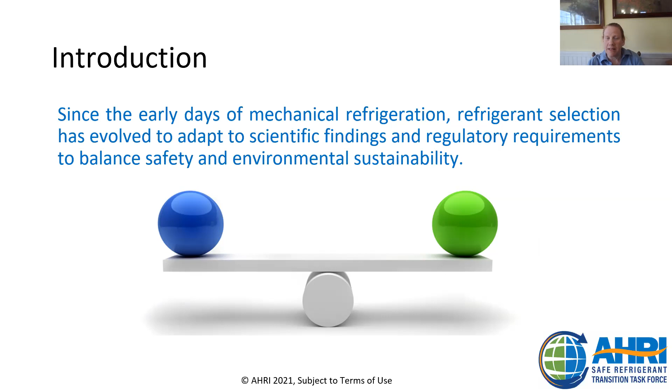So we just want to firstly talk to you about refrigeration regulations in general. Since the early days of mechanical refrigeration, the selection of refrigerants has changed to adapt to scientific findings and regulatory requirements, balancing safety and environmental sustainability. So now I just want to talk with you a little bit about refrigerant regulations. Refrigerants are approved by the Environmental Protection Agency only after an analysis of safety, toxicity, flammability, and other environmental factors. Also, we're going to talk a little bit about the 2020 American Innovation and Manufacturing Act, signed into law on December 27th last year by President Trump, which requires a transition of current refrigerants.

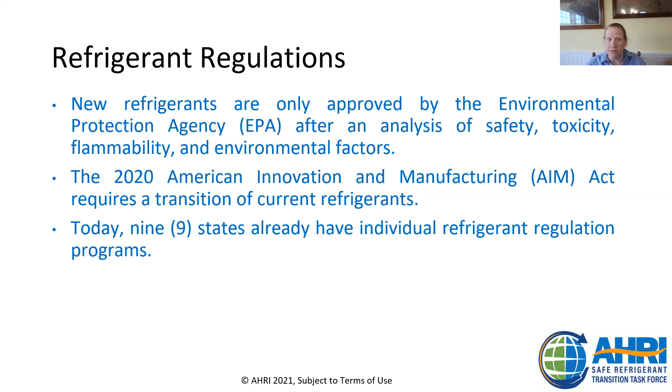Today, in addition, it would be important to note that 9 states already have individual refrigerant regulation programs requiring transitions of refrigerants. In summary, current refrigerants are being replaced by alternatives, such as A2L, lower flammability, and traditional refrigerants with a smaller environmental footprint.

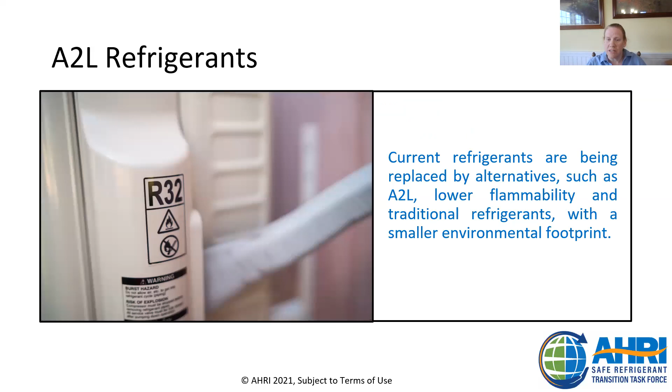So the EPA I mentioned earlier looks at refrigerants from the perspective of safety, flammability, toxicity, and environmental footprint, and then determines their suitability for use. The EPA Significant New Alternatives Policy Program, the SNAP program, allows flammable refrigerants as long as the safety standards are adhered to. So for example, residential and light commercial air conditioning refrigerants are just now allowed this month for larger charge sizes. For smaller charge sizes, they've been allowed since 2015, for chillers since 2012, for self-contained refrigeration also since 2012, and auto air conditioning since 2011.

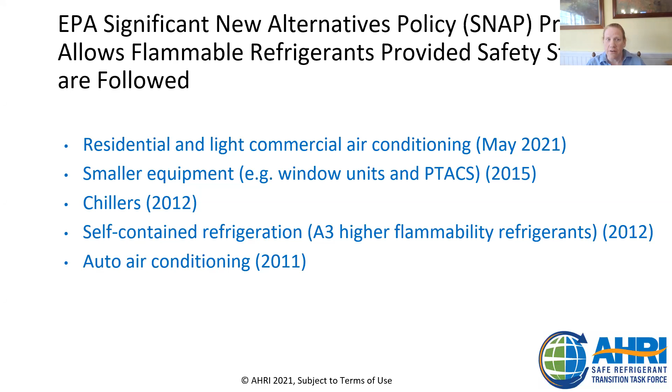On the other side of things, there are mandates in some cases from a regulatory perspective to transition away from older or current refrigerants into refrigerants that will likely be flammable. So today, plug-in appliances, like refrigerators in your home, window units that you might purchase at a big box store, and light-duty vehicles all contain A2L refrigerants or A3 refrigerants now.

In 2024, we anticipate that commercial refrigeration equipment in Washington State will be using a flammable refrigerant, as will chillers. In Washington State and 9 other states, residential and light commercial air conditioning equipment will likely transition across the nation in 2025. And probably in 2026, remaining commercial refrigeration equipment will transition away from current refrigerants, including to some A2L or A3 flammable refrigerants.

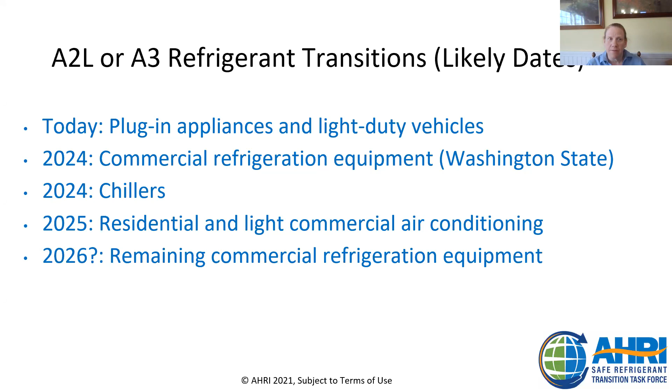So it's important to quickly think about what's the same: what are the hazards of the current refrigerants? With current refrigerants, if there's a combustion, if they're exposed to fire, any fluorinated refrigerant will combust to a hydrogen fluoride gas, which would become hydrogen fluoride acid if water is sprayed on it. Oxygen deprivation is possible in tight and enclosed spaces, like a crawl space, or even a machine room for a large charge size.

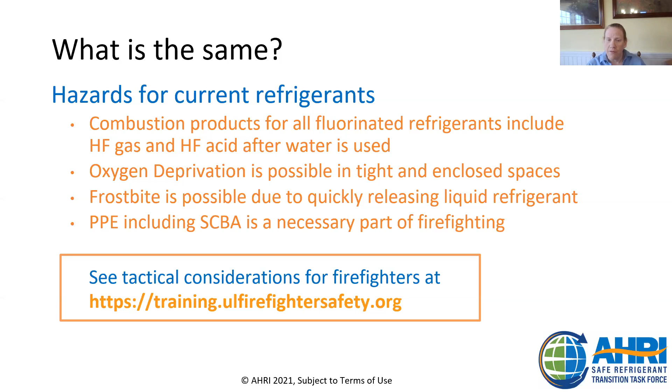Frostbite is also possible with a quick release of a liquid refrigerant, and personal protective equipment, PPE, including SCBA, is a necessary part of firefighting. And the tactical considerations for firefighters at this link will provide you with much more information than we will get into today.

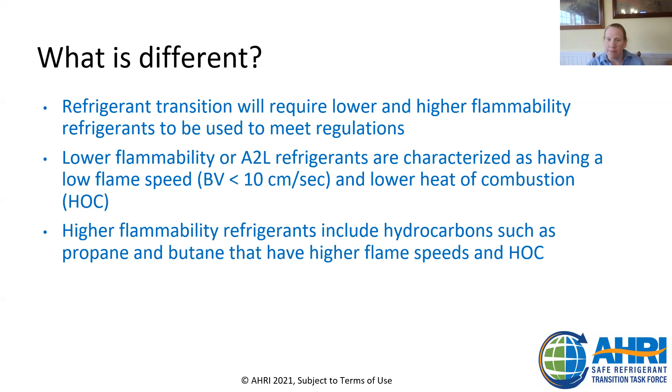So what's the difference? What's new with these new refrigerants? The refrigerant transition will require lower and higher flammability refrigerants to be used to meet regulations. These lower flammability or A2L refrigerants, as you may hear about them today, are characterized as having a low flame speed and a low heat of combustion. Higher flammability refrigerants include hydrocarbons such as propane and butane that have high flame speeds and high heat of combustion.

So AHRI, the Department of Energy, the California Air Resources Board, and the American Society of Heating, Refrigerating and Air-Conditioning Engineers have spent well over $7 million in next generation refrigerant research. They've looked at the validation and mitigation of safety standards, leak detection technology, ignition byproducts, ignition properties, flammable refrigerant product risk assessments, ignition sources, and other research around the safe use of flammable refrigerants.

So what was missing? Why did we move forward with this 8028 project? Refrigerants and Firefighter Tactical Considerations is the first project of its kind related to fire impinging on refrigerants and equipment, to provide practical information for first responders for the purposes of developing training. Although there's been a considerable body of industry research, it's focused largely on A2Ls with some research on A3s. This piece of the puzzle was missing.

So what does this change mean for the fire service? What are these A2L refrigerants and how do they compare with the substances they're replacing? Some of these were questions the fire service had. I want to turn to our panelists today: Kathy Stacia and Chief Offerman, as well as Steve Kerber and Dick Lord. I wanted to open the floor for you to talk about what you saw and what you needed to know to be comfortable with this transition. Kathy, is it okay if I start with you? What were you looking for? What kind of information was missing for you?

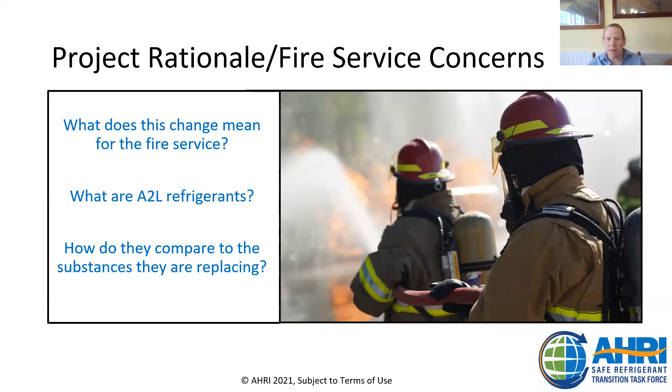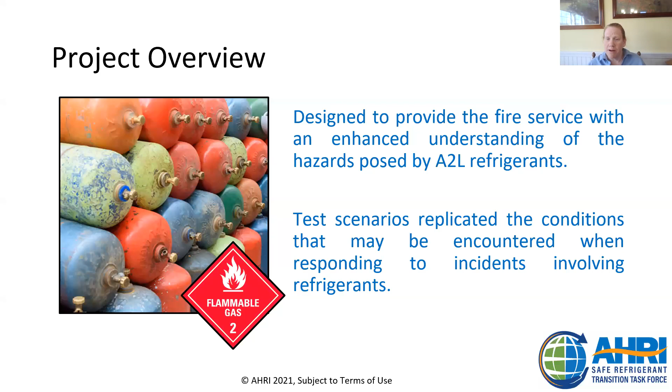Thank you, Kathy. That's very helpful. And Mary, you can probably go to the next slide. And so I think there was kind of an exploration around what was needed from the fire service perspective, and we tried to put together some test scenarios to replicate some conditions that might be encountered when responding to incidents involving refrigerants. And we'll talk a little bit more about those here in a minute. Mary, if you could go to the next slide. So these are the organizations and collaborators that worked together to develop these scenarios. And then we're just going to go to the next slide, Mary, and then maybe we'll open it up again for the panel to kind of talk through this a little bit.

So the fire service had several requests and wanted to look at a couple of different scenarios and better understand things. Bill, if you don't mind talking a little bit about what you were hoping to see, and Steve, maybe what you all were hoping to see in some of this work, that would be very helpful.

Thanks, Ellen. When I first found out about the flammable refrigerants, we were concerned that this was going to react similar to propane. So we were anticipating a much higher level of fire spread and possible explosion in residential situations, commercial situations. It was something that we did not see through the testing process. So it was quite the surprise to not have that situation.

However, the toxicity, I should say, the hydrofluoric acid that was developed was a bit of a surprise as well. We were not aware of that. It really wasn't much of a change from the existing refrigerants. However, we were not aware that it was there to begin with. So now that we're putting together the training to make sure everybody's aware of it and make sure that they keep their gear on, their air packs, I think it's gonna be great for the fire service to at least catch up to where we need to be. Steve, is there anything you'd like to add?

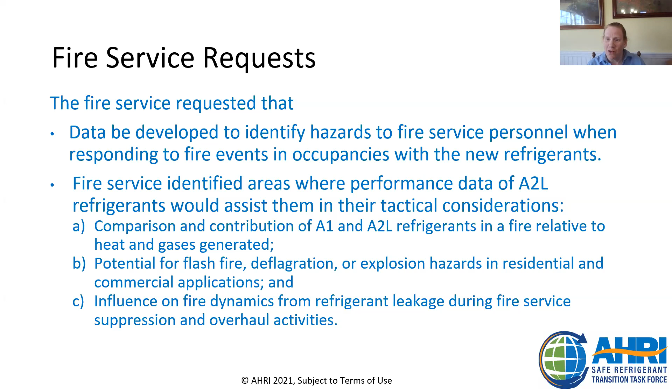Steve, you took the words, and I was just going to say thank you to them. I know they're not on this panel, but thanks to them, and thanks to Bill and other folks that attended all those sessions, Dick and others that sat through all those very long days, and all the work that went into this. I think a really nice product has come out of it. Mary, before we just keep congratulating everybody in a circle, we probably should move along to the next slide and let Steve talk a little bit about these scenarios.

Yeah, thanks, Helen. So I'm going to briefly go through the scenarios that were covered in the project. Essentially, once all the stakeholders agreed on what the questions were, we all had to figure out how we were going to get these answers. And that wound up showing itself as a series of test scenarios, in which many variables were examined, many iterations were done, many different refrigerants were examined. And ultimately, this becomes the backbone of the online training course I will talk about. That's one of the ultimate outputs of this project.

So scenario one was conducted to collect comparative data on selected A1 and A2L refrigerants, and to really look at quantifying what they contributed to the heat and the gases generated during a fire. As you can see in the picture here, simulating a refrigerant leak blowing across a fire that is already existing to see what it contributes to the ultimate heat release rate, as well as other measurements, whether HF concentration, temperature measurements, heat release rate, were all important.

We saw this as a nice side-by-side comparison, something that's been effective before during other experiments. If the fire service can see one right next to the other, that provides a pretty good visual indication as to how they're different. And that's what we were going for in scenario one.

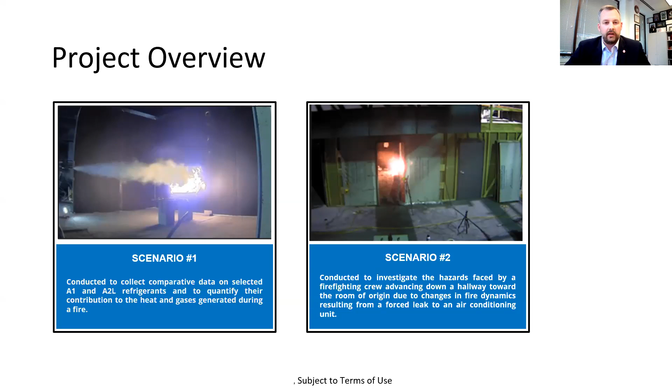Both of those scenarios were examined, and ultimately the measurements here are looking at if a hose line is being advanced, and the room of fire, let's say, is a basement storage room at the end of the hallway there. If they were on their way, not able to put water on the fire yet, what would the resulting fire dynamics be should that leak occur, is what we were going for in scenario 2. Next slide.

So scenario 3, ultimately the team decided didn't need to be run. This was really set up as an optional scenario based on what we learned in scenario 2. The difference here was going to be, instead of forcing the leak, a leak would be created due to the fire conditions. It would essentially be set up like an actual unit.

But since the forced leak, both inside and outside the unit, really didn't create more hazardous conditions in the corridor area we were focused on from a fire service perspective, everybody got together, the UL staff, the AHRI staff, and the fire service observers, and felt there's really no sense in replicating the same thing again. Let's put our efforts and resources elsewhere as we move forward. So we did more of scenario 2 maybe than we thought, but ultimately didn't have to run scenario 3.

For scenario 4, our objective was to assess the hazards in a room fire during overhaul activity if the firefighters' actions result in a catastrophic refrigerant leak. So they break the line.

Kathy was explaining overhaul very well, but overhaul tends to be incredibly chaotic. Sometimes it's in limited visibility. It often involves tools, a lot of chopping, cutting, pulling, pushing, all of those things to make sure that the fire is not extending further into void spaces and making sure it's completely out. That could easily result in a line being compromised or crushed or disconnected or whatever the case is.

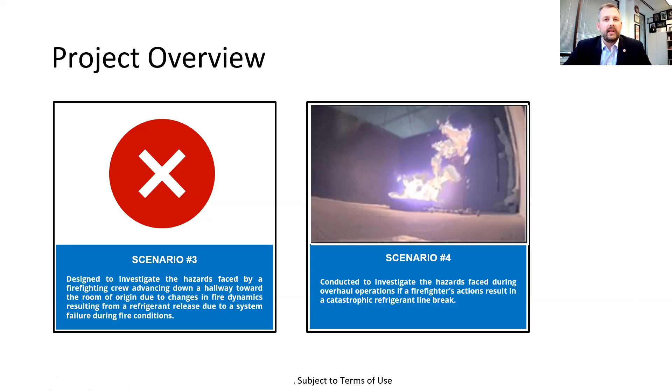And then next slide. Scenario 5, this is really where, again, everyone came together and said, well, we didn't really see any pooling in experiment 4. Is it possible to force it so that we can get a sense of what flame spread rate really looks like? Should the pooled refrigerant ignite, how quickly does that fire spread? Does the fire service have time to react?

So in order to get this particular condition, we had to pretty much replicate a very slow leak into a very tightly sealed room to get the quantities that we needed to hit those flammable limits with very little air movement or ventilation in the room. And we really had to extend beyond what is probable here to put all of these conditions together, but we really wanted to provide that visual observation to the fire service so they can see the difference between how A1 and A2L refrigerants appear when ignited.

And we have a still shot here that in itself is very interesting, but I think this alone should be a reason to go to the online course to watch a video of this particular scenario. It's very interesting how the fire moves across the room, what I would consider relatively slowly.

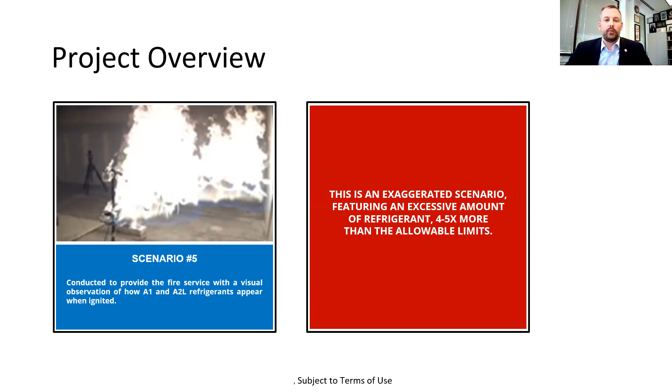Yeah, it got to the point where even one of the UL engineers was running computer models overnight to figure out what height we had to put the igniter and how many different igniters we could try so that we were sure to get an ignition. So it was a neat engineering problem to get it to go.

It was. Steve, thanks. I'm sorry to interrupt you. And it was a great conversation, though, so thank you. Absolutely. Let's go to the next slide.

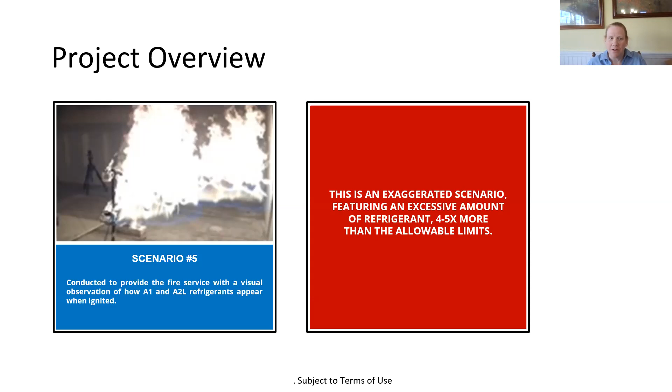So we talk about the technical component of this project, and the result of the technical component of the project is the technical report. It summarizes all the research work conducted by UL, and it was authored by research engineer George Hunter. It's important to acknowledge that the report is meant for technical audiences, particularly if an audience wants to know every little detail, wants to examine the context of the research, you want to dig into every single measurement, you want to look at hundreds of graphs, or ultimately if you want to replicate the research or build on the research. That is why the technical reports are so important.

It adds to the body of knowledge that we have. All the experimental methodology, the detailed test results, all of that are in the report and organized, and it's all available on the AHRI website. If you go into their research report section, you can download the report.

We also have this report available on the online training program. So there's a resources tab on the online training program, which I'll show you in a second, that allows you to get to the report very quickly if you want that technical detail behind the online training. Next slide.

So here we are, online training. From the beginning, myself and our colleagues at UL FSRI knew the importance of getting whatever the information was that was going to come out to the ultimate stakeholder, which in this case was the fire service. Our experience working with the fire service tells us that they're an incredibly diverse group of people. They've got varying response areas, they've got varying interests, they've got varying challenges, and they're not always looking to read several hundred-page research reports.

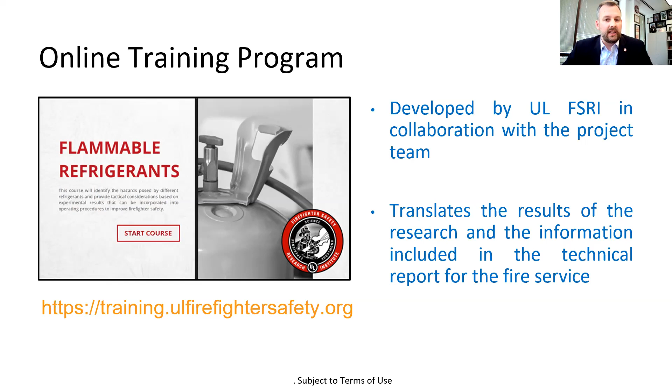And this is one more course that we will add to that catalog, and hopefully we get a lot of eyes on it, because I think for the most part, the fire service as a whole hadn't seen refrigerants, any refrigerant for that matter, as what it means to their operations. Hopefully we can raise that visibility with this online training course. Next slide.

So we want you to go take the course. I'm not going to go into a ton of detail here, but the audience, as I mentioned, is the fire service. Other stakeholder groups can certainly benefit from the course, but obviously the meat of the course is tactical considerations for the fire service. It goes through all the scenarios, it goes into details, it shows videos, so all of that is there, even if you're not a fire service member. There's information about regulations and classification of refrigerants and things along those lines, which you'll find interesting as well.

What we ultimately want is the fire service to consider this as part of how they do their work and revise their standard operating guidelines. So there's a lot of information in here that's immediately actionable, that they can start a conversation at the kitchen table of the firehouse tonight and talk about what they learned in this course and what it might mean to their safety and their operations.

The objectives of the course are that we want them to be able to describe the evolution of refrigerants and the characteristics of the substances found in residential and commercial refrigeration and air conditioning applications. We want them to compare the results of performance tests conducted on 3rd and 4th generation refrigerants. And we want the students to identify the hazards presented by flammable refrigerants and incorporate tactical considerations based on the experimental results into their standard operating guidelines to improve firefighter safety. Next slide.

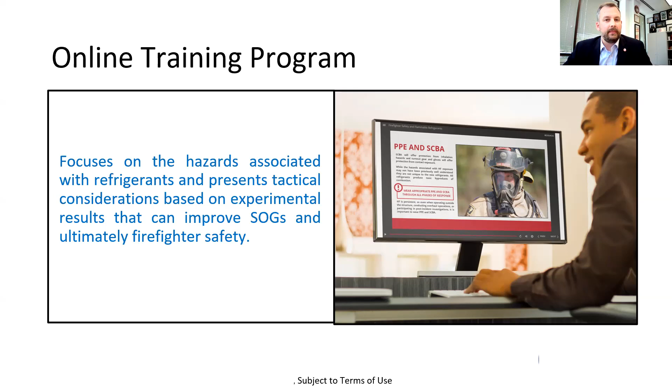So how do you get there? Well, the course is accessible free via the UL-FSRI Fire Safety Academy. You've got to enter a few fields to create an account, but it's completely free. The course is laid out in modules that cover an introduction, like we talked about, classification of refrigerants, tactical considerations, and a summary and assessment.

So in about 45 minutes, you can go through all the material. There's some optional material that you can dig into in more detail should you want to. But in 45 minutes, you should be completing the quiz. And if you score well enough, you'll be issued a certificate of completion. And we hope that we get a whole lot of you and a whole lot of the fire service going to the website that's on the slide here and going through the course. Next slide.

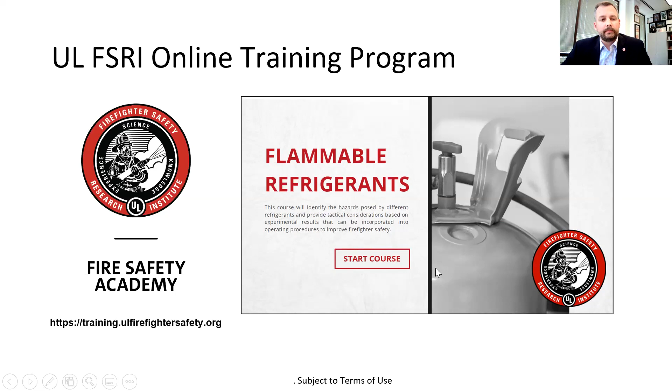So thanks, Steve. So just before I wrap us up and move to the questions, I just wanted to say a special thank you to Angie Bennett. She took a huge stack of research and information around refrigerants and air conditioning, something that perhaps she didn't know very much about, and she condensed it and made it understandable. And put it in that common language that we can all understand, as well as incorporating the tactical considerations and safety measures, to keep the fire service safe.

So I just wanted to give a special shout out and thank you to Angie for all the work that she did very, very quickly. And I've looked at some of these other courses that she's got that the folks at FSRI have posted on their site, and they really are fantastic. And if you haven't had a chance to look at that website, that's a great place and a great resource.

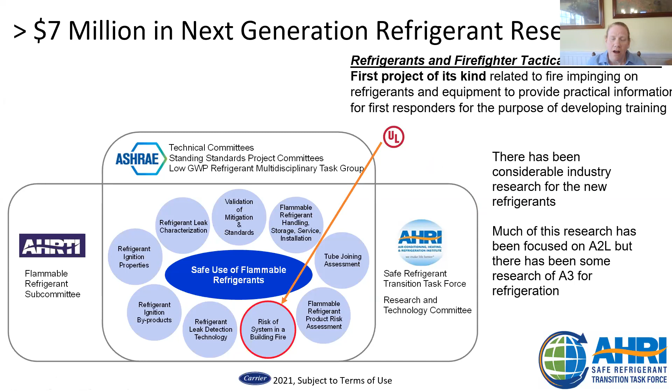So with that, we're going to turn our attention to the questions in a minute. But again, the way that this puzzle fits together is the refrigerants and firefighter tactical considerations. The first project of its kind related to fire impinging on refrigerants and equipment any place in the world, to provide practical information for first responders to develop training. In spite of all the other research that's been done, I think this puts this into the right context for first responders. So with that, we can go to the next slide, Mary.

So as we noted, the fire service was looking for some data to be developed so that they could look at hazards specific to their needs to keep them safe, as Steve mentioned, in their workplace. That was completed through this collaborative effort between the fire service, equipment manufacturers, component manufacturers, and others, and UL especially. And then it's resulted in this online training. And again, I would watch that training. It's a great class, and I think one of the things that we didn't really point out and stress.

I think Bill and Kathy maybe made this point early on. From their perspective, knowledge about the hazards related to refrigerants that are in use today is not always clear to people, and the training also provides that information. And so I wouldn't wait to take this class. I would go ahead and take it now, as an opportunity to look at the hazards that are in existence today.

There's some questions from the participants. So I'm gonna start with one for Dick. Dick, this is a technical question that's gonna ask about which refrigerants were used, and then there's a question about somebody who apparently does training and wants to know what ratio of gas to air mixture they should be thinking about, 13% or 23% or 27%. So I'm going to open that up to the fire service folks, but first I'm going to ask Dick about which refrigerants were used in the project.